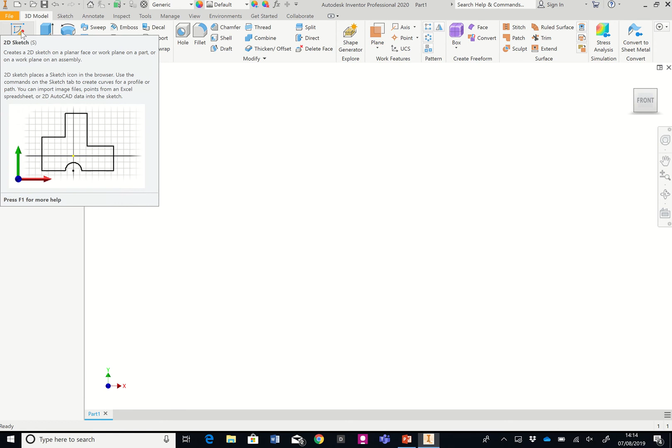Once we've done that, a few planes will come up once we have pressed Start 2D Sketch. So we're going to left click up here and click any of these planes, and then we can start to create our sketch. We're going to start off by creating our frame and assembling it together, then attach the base on, just like you do in the workshop.

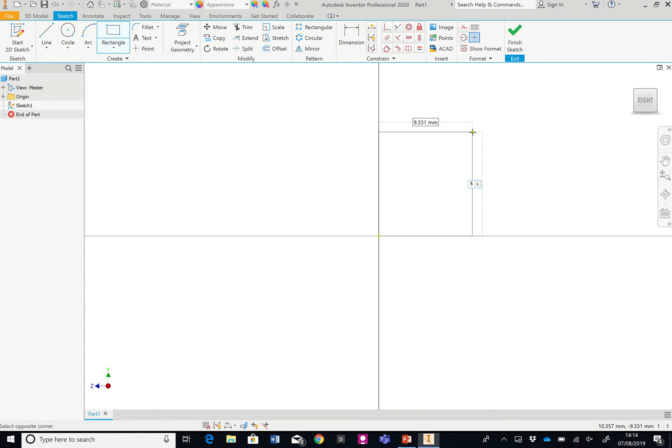The way we do that is we click the rectangle tool, left click on the mouse, find the green dot there, and we are going to create a piece which is 45 by 20. We type 45, then press Tab, not Enter, so we can change dimensions. Then we type 20, and press Enter.

If we press this button here, this little drop down, we can go Zoom All, and then we can make sure we can see the whole thing here.

And we need to create the channel which is going to be routed away. So the way we're going to do that is we come in from this top corner with the rectangle tool. We need to go 10 across and 8 deep, so we press 8 for depth, tab, 10, and that's our channel.

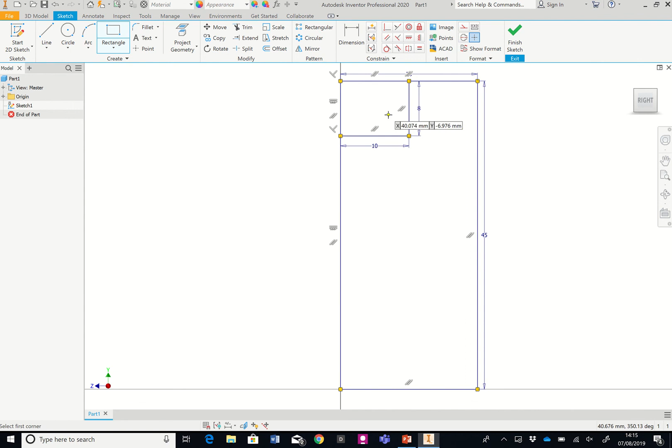We are then going to go 3D model, and we're going to extrude this channel. Left click it, and then change the distance. We're going to change it to 600, and we're going to press Enter or OK.

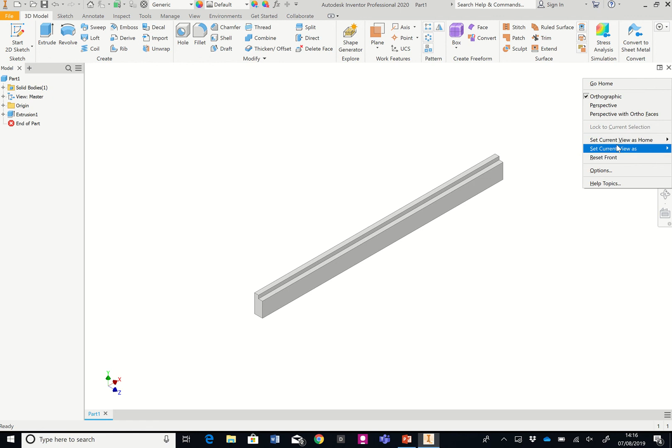Press this button here, you will see that this whole frame comes into place, and then we are going to mirror this. So if we just change the view here a little bit, change it to that view, you might want to right click on this button here and press Set Current View as Home. That just means it will always go back to this when you press the house.

Then what we're going to do is go up here and press the drop down. We go Offset from Plane, and on this edge here, this inside edge here, we press 190, so we offset a drawing plane. Again, you might want to just make sure it's within view.

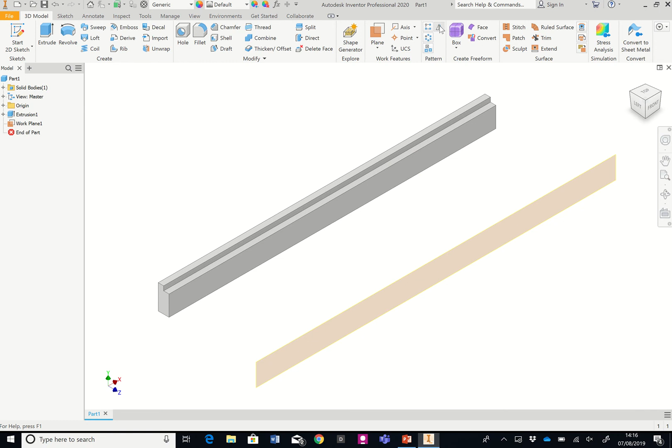And then what we're going to do is mirror, so there's this tool up here. I'm going to select this solid. We're also going to make sure that we've clicked Mirrored Solid, and then we click this button here so it creates a new solid on the other side, separate, and we click Mirror Plane, this one here, and the other piece should appear over here.

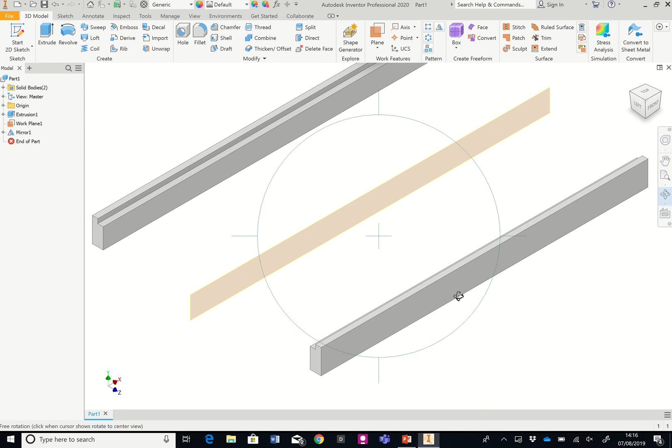Now we've got two separate solids, and that is kind of the sides to our frame. Nice and easy.